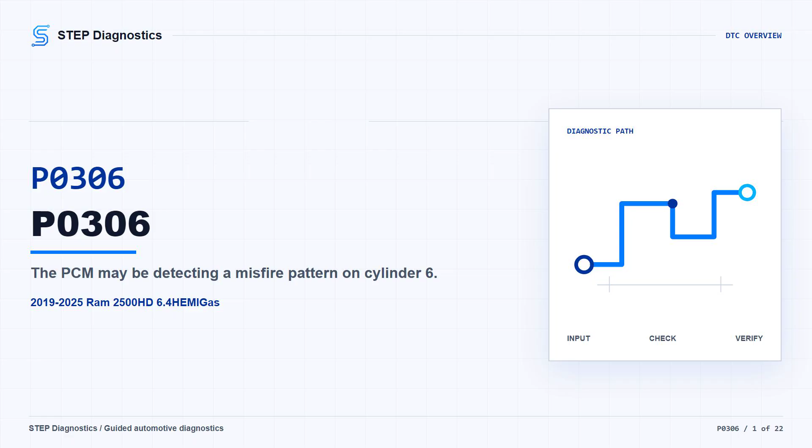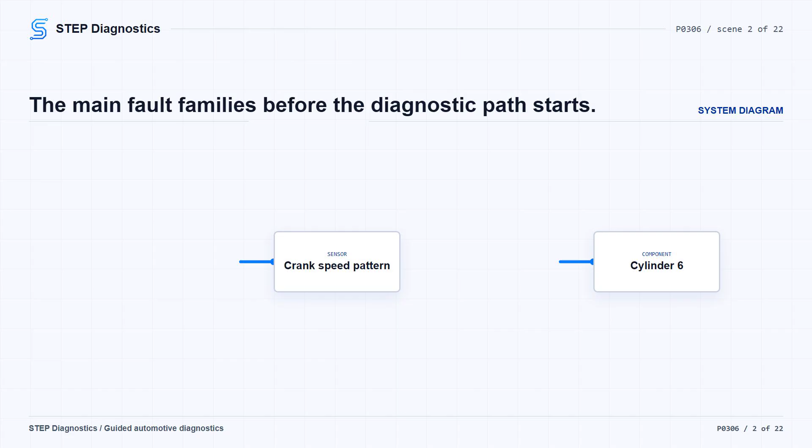P0306 on this Ram 2500HD with the 6.4 HEMI gas engine means the PCM is seeing a cylinder 6 misfire pattern. The truck may run rough, hesitate, flash, or turn on the MIL, and stop/start may be disabled while the fault is active. Broadly, this can come from ignition, fuel delivery, air leaks, engine mechanical issues, oiling or valvetrain concerns, wiring, connector problems, or the PCM's control side.

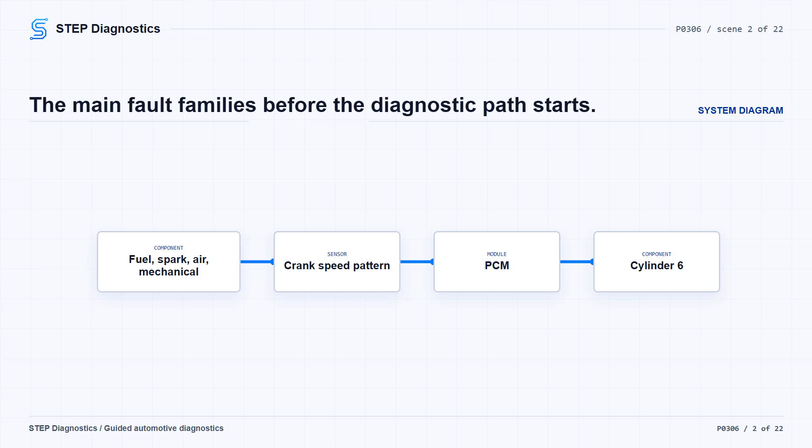The important thing is not to guess at cylinder 6 parts. Work the misfire in order and prove where the fault is. Start with the basic system checks.

Turn the ignition on, read and record all codes and captured operating data, and try to reproduce the same conditions that set P0306. During the road test, note exactly when the misfire shows up, because that matters later. Watch the downstream oxygen sensor behavior while the misfire is occurring, and use the misfire monitor to confirm cylinder 6 is the cylinder counting excessive misfires.

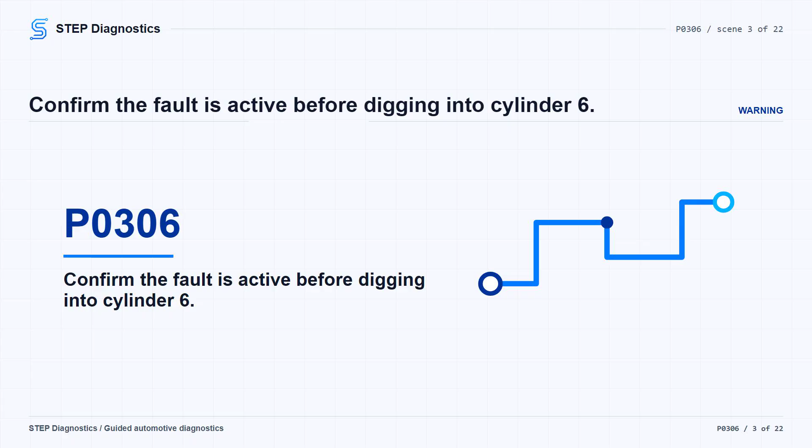If cylinder 6 is not misfiring now, treat it as an intermittent condition instead of forcing a diagnosis that is not active. While the misfire is present, the downstream oxygen sensor can give you direction. Readings consistently low point toward a lean condition or lack of fuel, such as a plugged injector or fuel system issue. Readings consistently high mean the catalyst is being loaded with too much fuel, which can happen from lack of spark or a leaking injector.

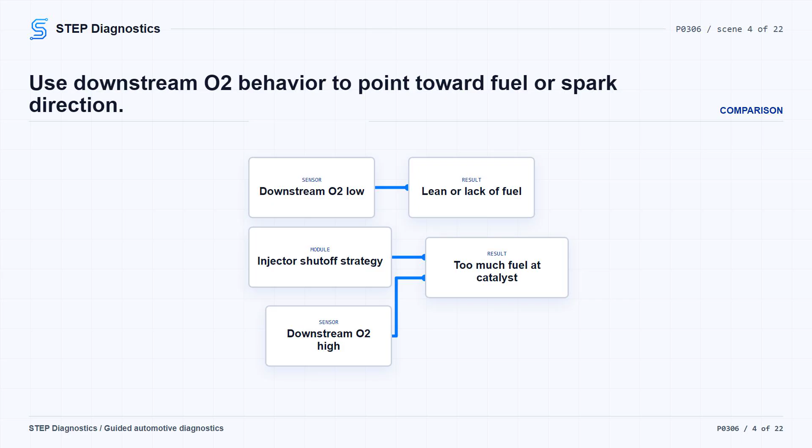Also remember that during a severe flashing MIL misfire, the PCM can shut off the affected injector to protect the catalytic converter. So a high load or high RPM misfire may look like it continues at idle until the reset strategy catches up. Next, look at the other recorded codes without turning this into a code list.

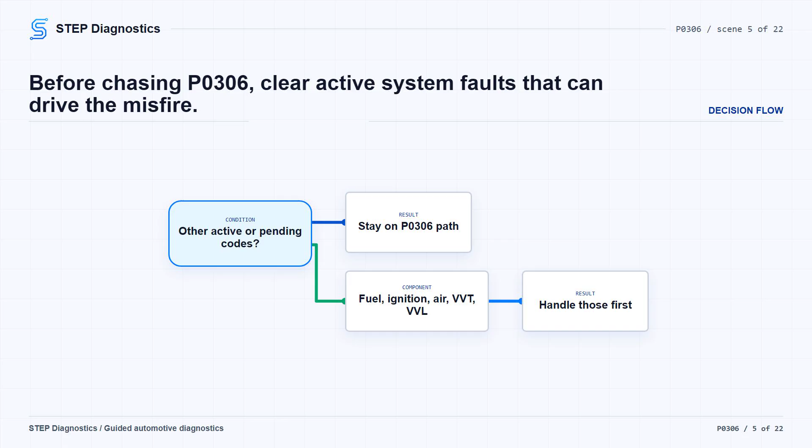If there are active or pending faults in the fuel system, ignition system, air handling system, VVT system, or VVL system, handle those diagnostic paths first. If not, keep going on the cylinder 6 misfire path.

With the ignition off, inspect the MDS solenoid harness connectors, jumper connectors, and terminals. You are looking for poor seating, damaged locks, corrosion, water intrusion, seal damage, bent or pushed back terminals, spread terminals, overheating from a poor connection, and weak terminal tension. If you find a connector or terminal issue, repair that condition and verify the repair. If that area is clean, move on.

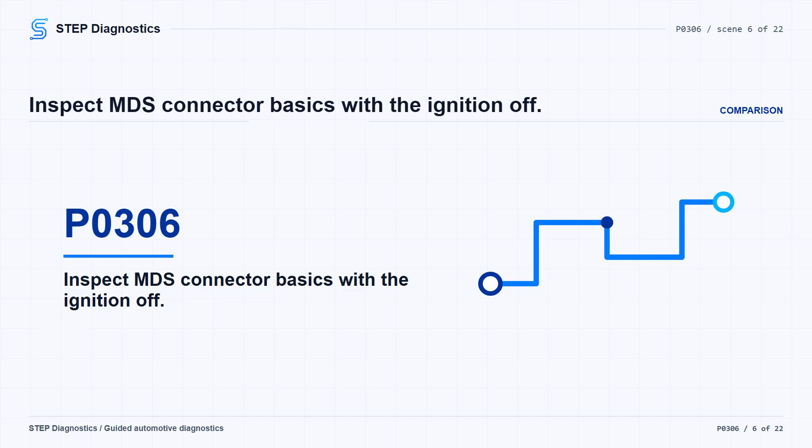Now do the bigger inspection. Check for belt wear, pulley misalignment or binding, improper sensor mounting, poor connector contact at key engine components, weak PCM power or ground connections, vacuum leaks, intake or exhaust restriction, signs of internal engine trouble, moisture on ignition parts, fuel supply or fuel quality concerns, and load-related complaints such as bogging or towing overload.

Anything that can disturb crankshaft speed can set a misfire code, so this is where you catch the obvious causes before going deeper. Repair what you find and verify. If nothing stands out, continue.

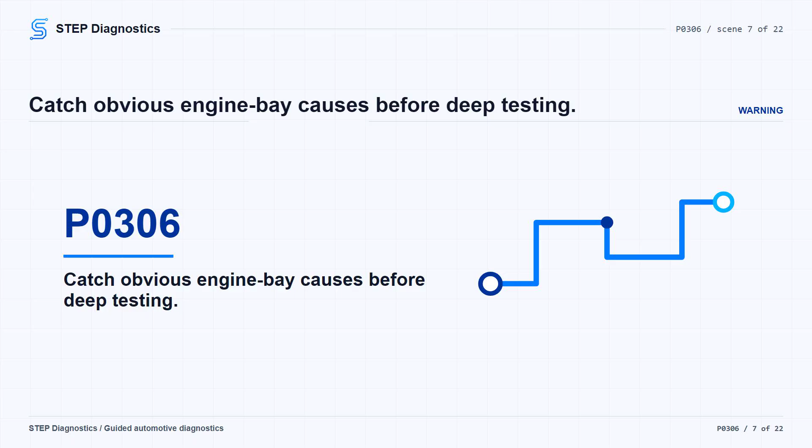Check the engine and intake manifold for vacuum leaks. If the intake system is leaking, repair the leak and verify. If not, check the fuel for water, wrong fuel type, old or contaminated fuel, and low fuel.

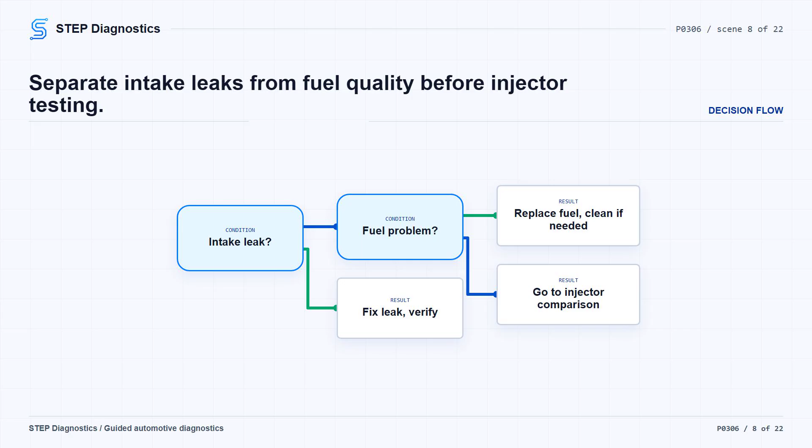Before touching fuel lines, release fuel system pressure. The fuel system stays under constant pressure even with the engine off, and mishandling it can cause serious injury.

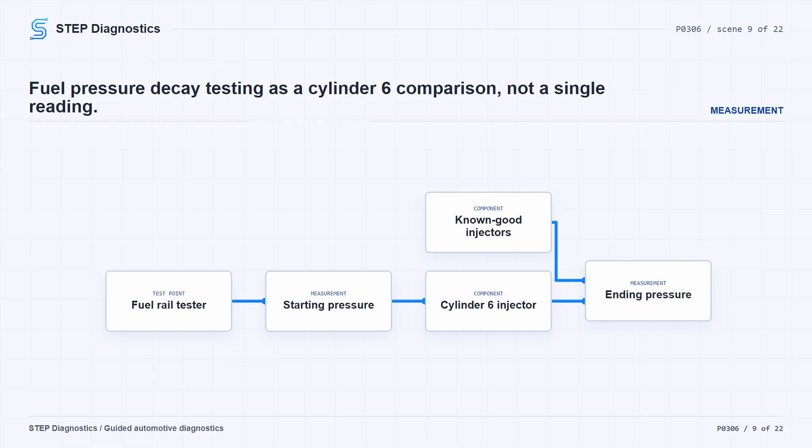Install fuel pressure decay tester 8978A at the fuel rail. Turn the ignition on, let pressure reach maximum and stabilize, and record that as the starting pressure. Command the cylinder 6 injector with the scan tool while watching the gauge, then record the ending pressure. Repeat the same test on several known good cylinders, starting each injector actuation from the same starting pressure.

After each injector actuation, start the engine to clear fuel from the cylinder, because failing to do that can damage the engine. Compare cylinder 6 to the known good cylinders.

If the ending pressures are about the same, keep going. If cylinder 6 stands out with too small a pressure drop, check for debris in the fuel rail or injector and repair as needed. If the drop is too large, suspect a faulty or fouled injector, then verify the repair.

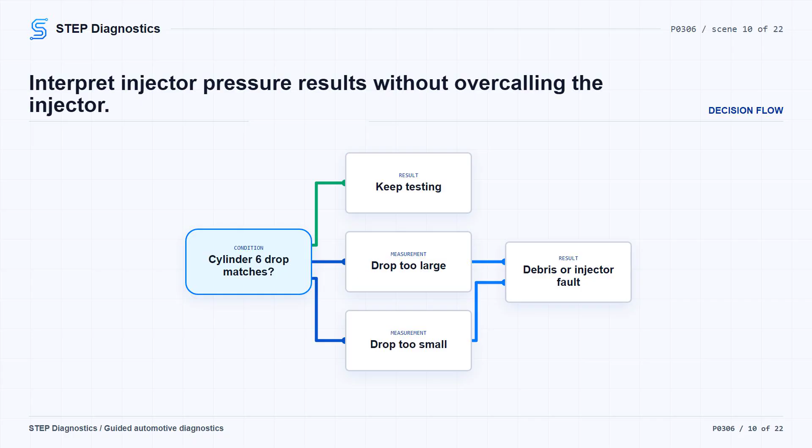Turn the ignition off, remove the fuel pressure decay tester and reconnect the fuel lines before continuing. Remove the ignition coil from cylinder 6, reconnect the coil harness connector, disconnect the fuel injector connector for that cylinder, and install a spark tester on the coil.

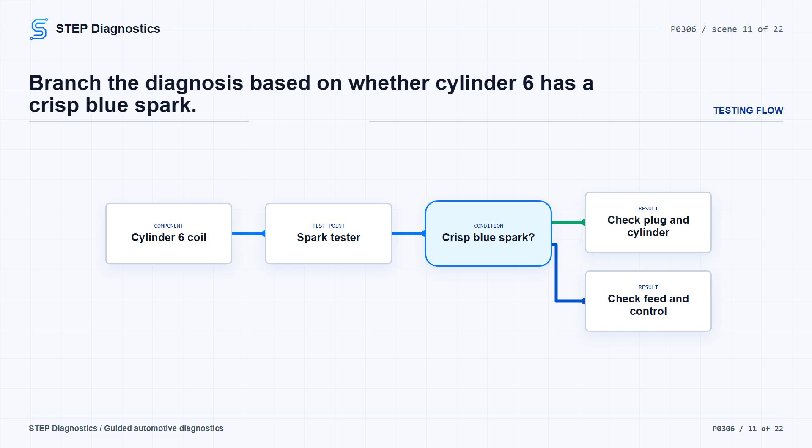Crank the engine and watch the spark tester. If you have a crisp blue spark, continue with the plug and cylinder checks. If you do not, skip ahead to the ignition feed and control circuit checks.

With the ignition off, remove the cylinder 6 spark plug and inspect it closely. Look for cracks, carbon tracking, oil fouling, coolant fouling, excess fuel, incorrect gap, or a loose or broken electrode. Also look for signs of oil or coolant in the cylinder.

If the plug has one of those faults, replace the spark plug using the correct repair procedure. If oil or coolant is present in the cylinder, diagnose and repair that root cause before calling the plug the fix.

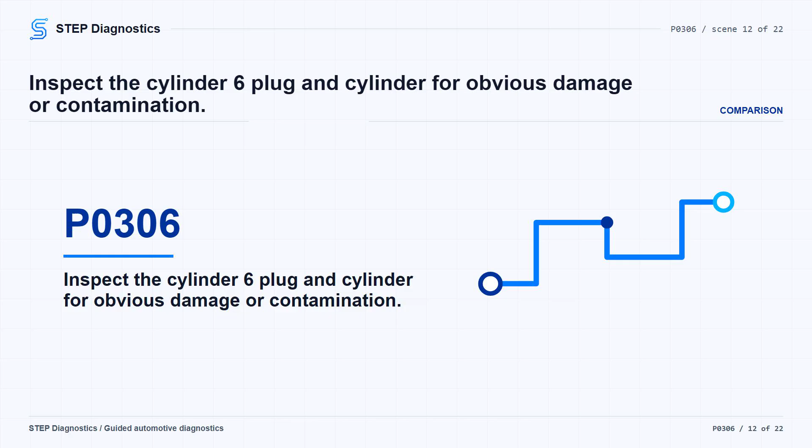Then verify. If the plug and cylinder inspection pass, move to compression. Run a compression test on all cylinders and compare cylinder 6 against known good cylinders. If compression is not within specification, perform a cylinder leak down test to decide whether the loss is coming from the valvetrain or combustion chamber. Repair as needed and verify.

If compression is within specification, swap the cylinder 6 spark plug with a known good cylinder, or replace the plug if access makes swapping impractical. Start the engine and watch the misfire monitor. If the misfire follows the plug or disappears after plug replacement, the plug was the issue and the repair gets verified.

If the misfire stays on cylinder 6, decarbon the engine with MOPAR combustion cleaner, drive it to clear the cleaner, erase the codes, and test drive under the captured conditions. If the misfire does not return, the valve and combustion chamber cleaning repaired the fault. If it returns, keep going.

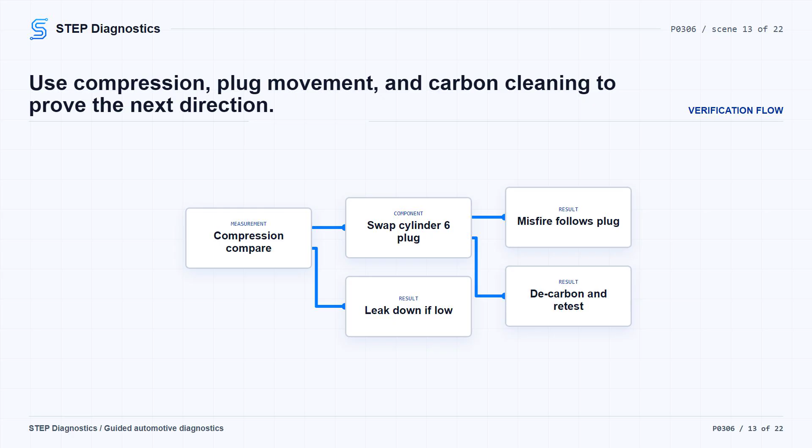Next, check engine oil level and condition, along with mechanical and oiling concerns that can affect valvetrain operation. Look for engine mechanical tolerances out of specification, oil pressure out of specification, low oil level, the wrong oil filter, deteriorated or dirty oil, contaminated oil, incorrect viscosity, or aerated oil. If any of that is present, repair the oiling or mechanical issue and verify.

If the misfire happened when engine speed exceeded 5,000 RPM and VVL is suspected, check VVL operation, including solenoid O-rings and leakage when the solenoid is off.

There is a cylinder mapping concern in this part of the path. The VVL description identifies cylinder 1, not cylinder 6, so do not assume the cylinder 1 rocker detail applies to this P0306 fault. Pause, recheck the earlier diagnostic path, and avoid guessing.

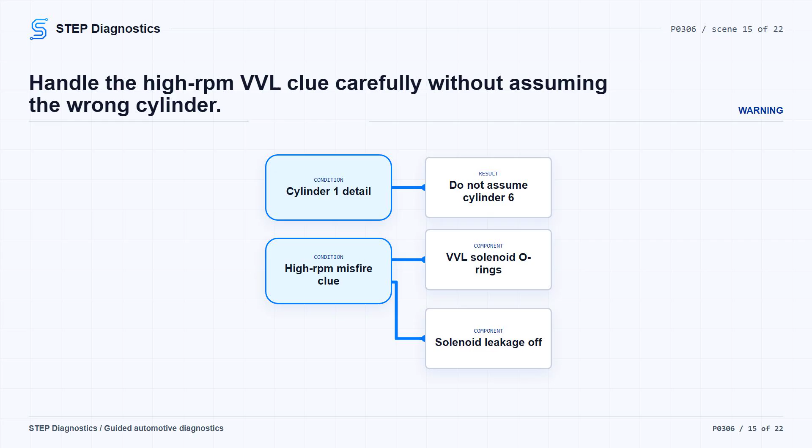If VVL checks do not explain it, inspect the camshaft lobes, rocker arms, and springs for excessive wear or broken parts. Repair any confirmed valvetrain issue and verify. If no issue is found there, move to the final harness and PCM connection checks.

If the earlier coil test did not show a crisp blue spark, go into the ignition circuit branch. Keep clear of the fan, belts, pulleys, and loose clothing anytime the engine is operating.

With the ignition off, disconnect the cylinder 6 ignition coil connector. Turn the ignition on, command the ASD relay with the scan tool, and use a 12-volt test light connected to ground to check the ASD relay output circuit at the coil connector.

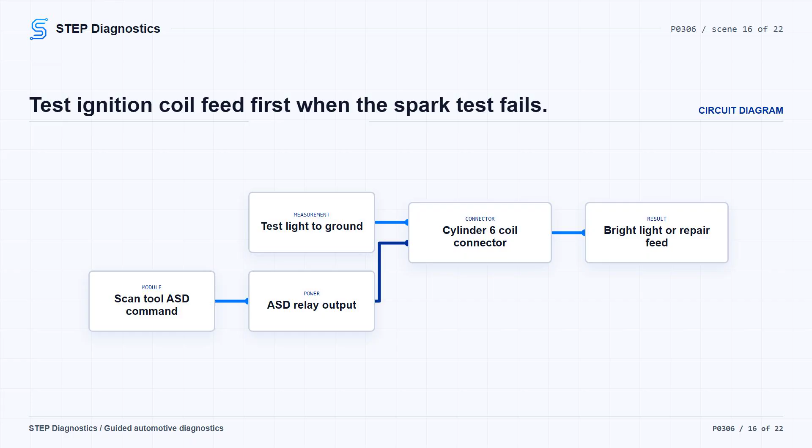If the light does not illuminate brightly, stop scan tool actuations. Repair the open or short to ground between the PDC and the ignition coil connector and verify.

If the feed is good, use a 12-volt test light connected to a 12-volt source, backprobe the coil control circuit at the coil connector, and crank the engine for 5 seconds.

A bright blinking light means the control circuit is being pulsed, so replace the ignition coil and verify. If the light stays on constantly, check the coil control circuit for a short to ground. If the light stays off constantly, check the coil control circuit for an open.

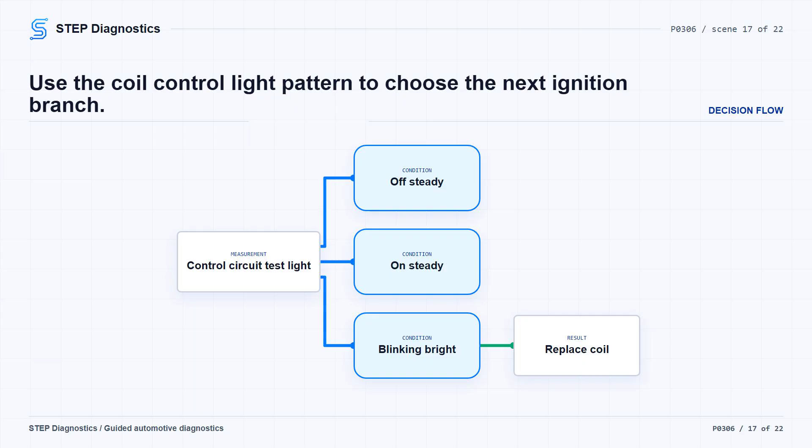For a control circuit short to ground check, turn the ignition off, disconnect the PCM-C2 connector, and install the GPEC Diagnostic adapter 10436 on the engine harness side. Do not probe the PCM harness connectors directly, because that can damage the terminals and create a poor terminal-to-pin connection.

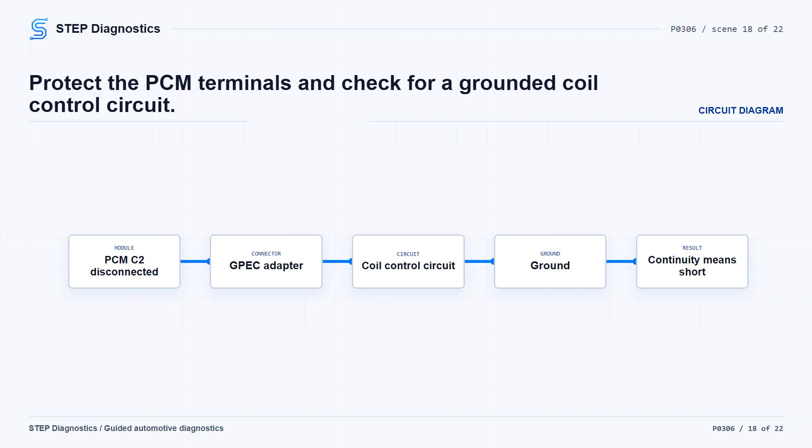Check continuity between ground and the coil control circuit at the ignition coil connector. If continuity is present, repair the short to ground and verify. If not, continue to the final connection checks.

For an open circuit check, measure resistance in the coil control circuit between the ignition coil connector and the GPEC adapter. If resistance is below 3.0 ohms, continue to the final connection checks. If it is not below 3.0 ohms, repair the open or high resistance in the coil control circuit and verify.

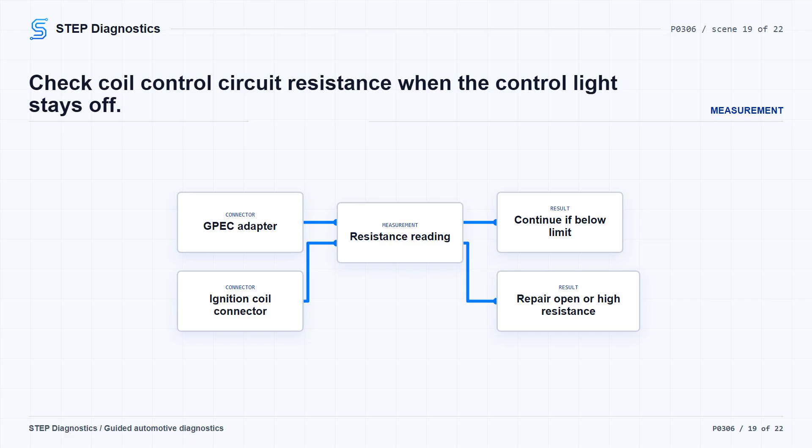For the final electrical pass, disconnect the PCM connectors, any related inline connectors, and the related component connectors. Inspect the connectors and terminals for seating, lock damage, corrosion, water intrusion, seal damage, bent terminals, overheated terminals, push-back terminals, spread terminals, and terminal tension.

Repair anything found. Then reconnect the PCM, inline, and component connectors, making sure everything is fully seated and locked. Erase the codes, operate or test drive the truck under the monitor conditions, and read codes again. If P0306 does not return, the wiring or poor connection problem has been repaired. If P0306 does return after those checks, replace and program the PCM, then verify the repair.

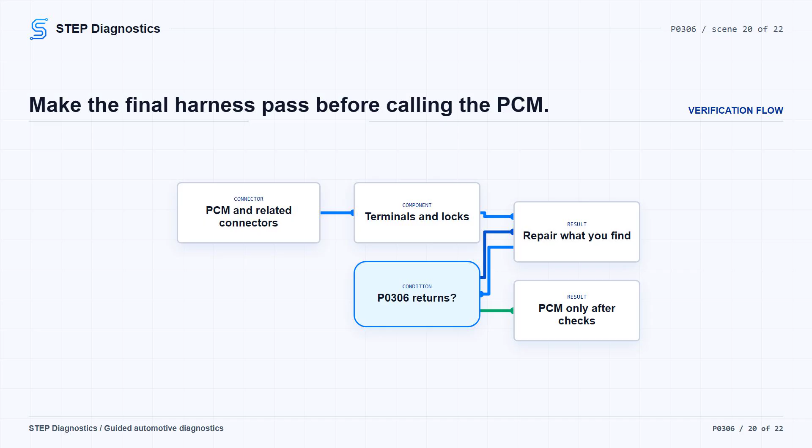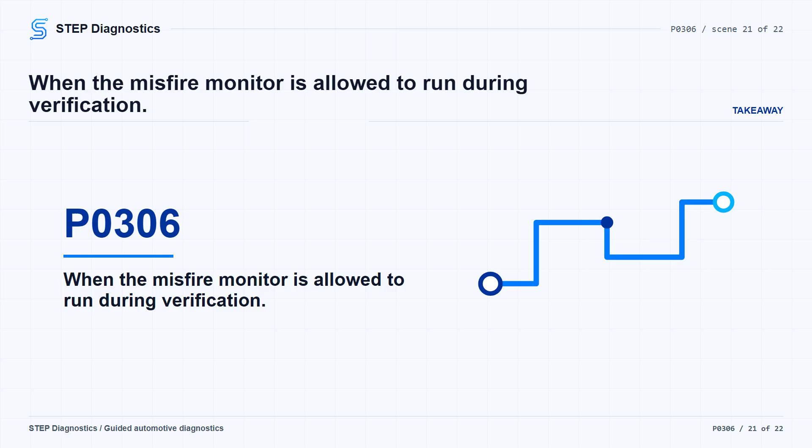Keep verification separate from testing. The misfire monitor is gated by conditions such as fuel level above 12%, battery voltage above 10.9 volts, ambient temperature above -23 degrees C (-9.4 degrees F), coolant temperature at engine start above -7 degrees C (19.4 degrees F), or enabling when engine temperature reaches 21 degrees C (69.8 degrees F), and engine speed between approximately 400 RPM and 6,200 RPM. The code sets when crankshaft speed variation between cylinders exceeds a calibrated value for engine speed and load.

So the takeaway is simple. Prove the cylinder 6 misfire is active. Use oxygen sensor and misfire data for direction. Check fuel, spark, compression, carbon, oiling, valvetrain, and wiring in order. And only make the PCM call after the harness and control circuit checks are complete.